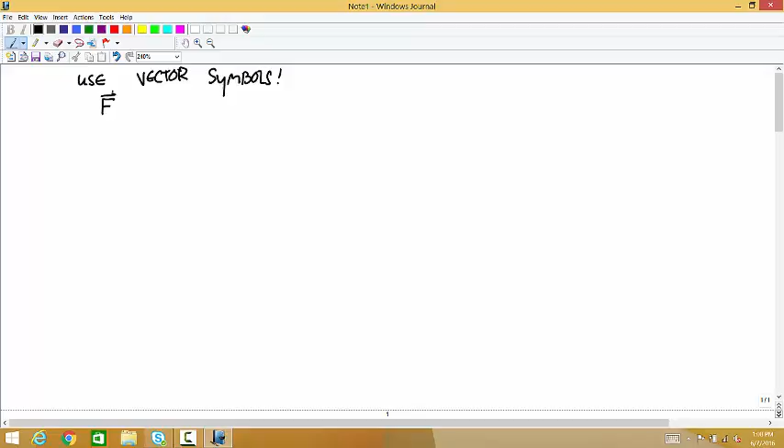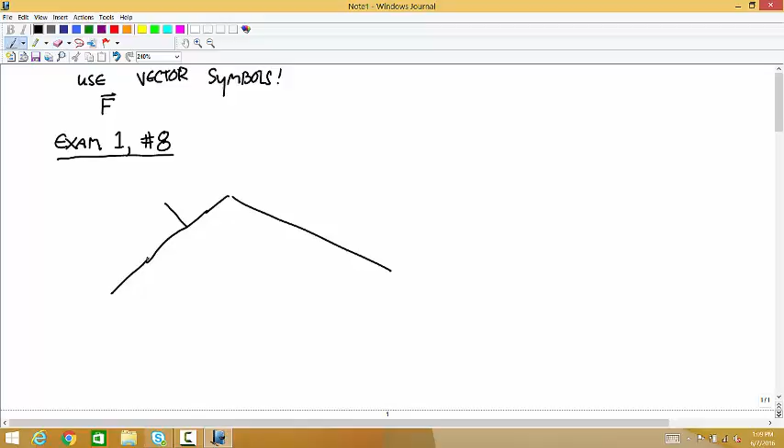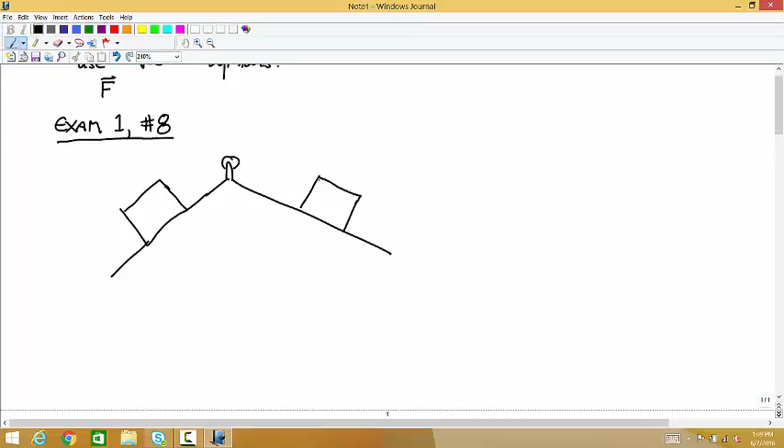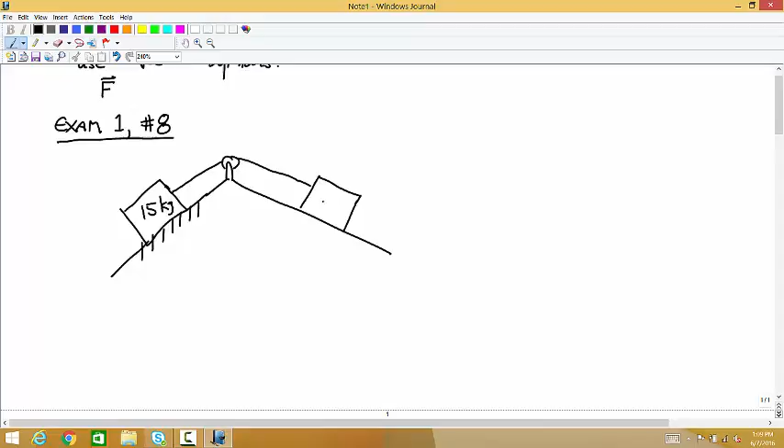So it looked like this: you had two boxes, each on a separate incline, connected to a cable that goes over a pulley. This one has a mass of 15 kilograms, this one has a mass of 10 kilograms. Then there's a downward force of 100 newtons here and a horizontal force of 50 newtons here.

And you had to draw the free body diagrams. So first for the 15 kilogram box: there was the weight, a force of 15G down, there was the 50 newton force this way, and there was the cable tension this way, which I'll call T.

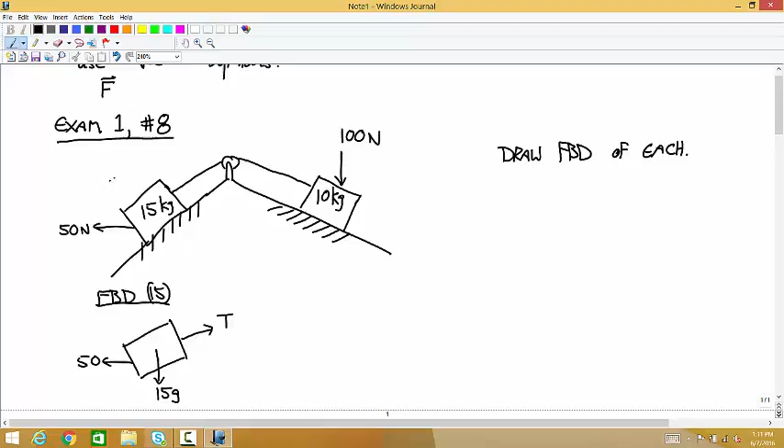And then it was a friction contact with the incline. Let's say we're using this coordinate system for both of them. The way you represent that is just as a full unknown force vector - I'll call that the force on the 15 by the ground, with a vector symbol since it's a vector variable.

And then for the 10 kilogram box, you have the weight, so that's 10 times G, then you have the downward force of 100 newtons acting there, you have the cable tension acting that way, and at the ground you have the force on the 10 by the ground. That's it. Any questions about that?

I have a question about the direction of the friction - is that always just going to be in the direction of the coordinate system? In this class, contact with friction is always just an unknown force vector. We're not breaking it up into a normal force and a friction force, we just draw it as an unknown force vector. So it doesn't matter - the direction of these axes depend on the coordinate axes, not the direction of the incline. Okay, gotcha, thank you.

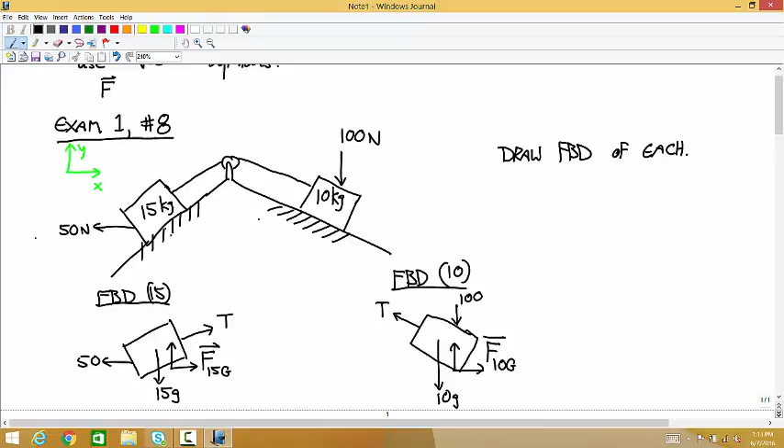Any other questions about this one? I had a question - if there is no friction on the 10 kilogram box, do I need to draw the reaction force for the 100 newton force? Yeah, if there was no friction, it would look like this.

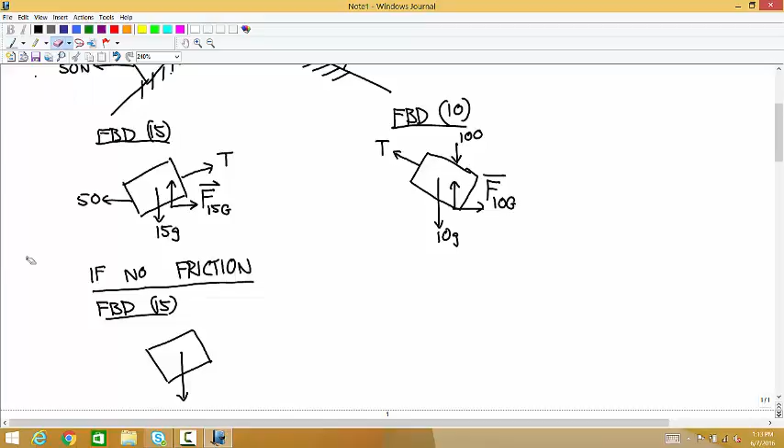You have the weight of 15G. You have the horizontal 50 Newton force. You have the cable tension. And then contact without friction is a force vector with a known direction, perpendicular to the surface of contact toward the chosen body. So it's the normal force.

What about the 10 kilogram? For the 10, you have the weight, the downward force of 100, the cable tension, and a normal force perpendicular to that surface. But normal force is only for the reaction force of the gravitational force, whereas you have the 100 external force pressing down. Do I need to draw the reaction force for just 100 Newton?

Nope. Because theoretically, if you press down stuff, this 100 Newton could be added up to the normal force. That's what I see, right? But say that this is in equilibrium, okay? If you calculate what this normal force has to be for this to be in equilibrium, with this at 100, you get one value. If you change this to 500, you get a different value for that reaction force. So that reaction force does depend on how big that force is pushing down. It does change, but you don't change the name.

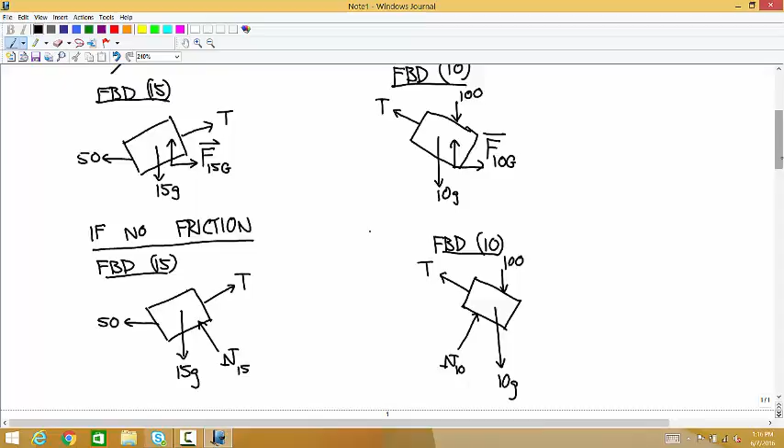Any other questions? Could you go over number 3? Okay, so number 3 says, what two unit vectors are perpendicular to the vector AB and the vector CD?

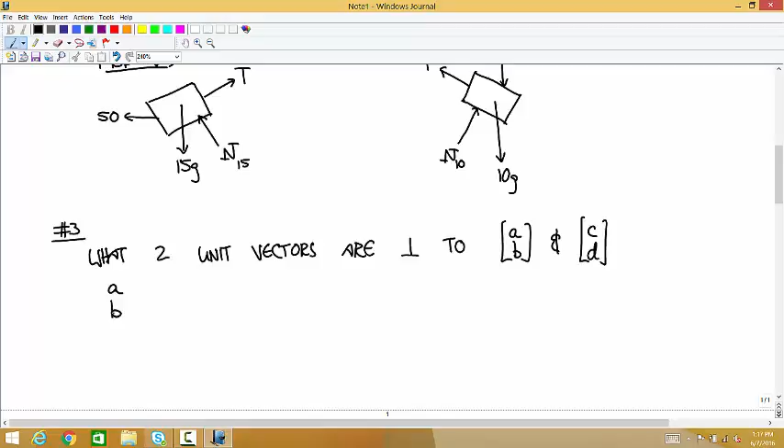The way we're going to do that is with the cross product. So we'll call it AB0 and cross it with CD0. And if you take that cross product, you get 0, 0, and then for the Z component, you get AD minus BC.

So in other words, a vector that's perpendicular to both of these is this. You could go through the whole process of calculating the unit vector based on these components, but what you can see is that this vector only has a non-zero component in the z direction. So you know that the unit vector in that direction is just going to be equal to either 0, 0, 1 or 0, 0, negative 1, because those are the two vectors with a length of 1 that are in the same direction as this, or that are in the same direction and the opposite of this. You could go through the process of doing this calculation and divide by the square root of the sum of the squares, and you'll get the same thing.

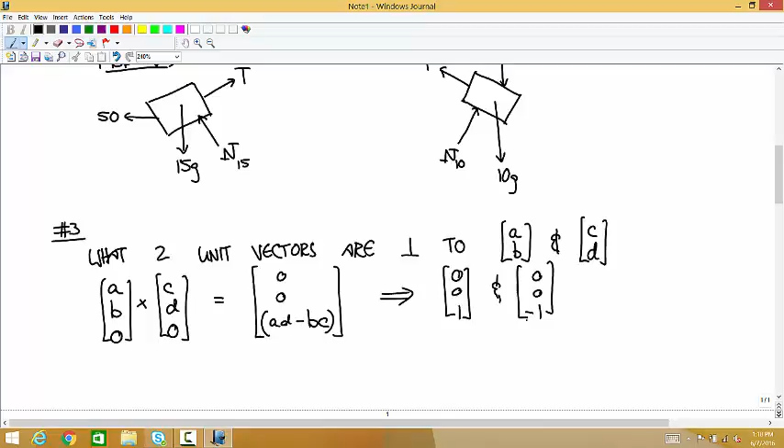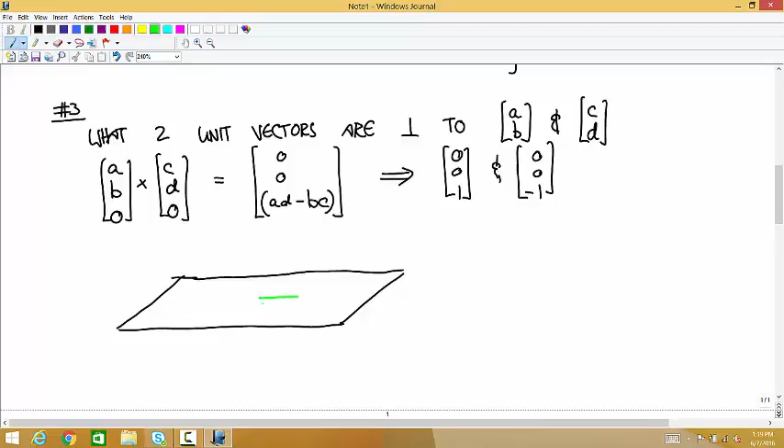Any questions about that one? Here's what's going on in this problem. So if this is the x-axis, there's the y-axis, okay? And we have two vectors that live in that plane, because they only have x and y components. So let's say one of these vectors is this, and one is this.

The two vectors that are perpendicular to these two red vectors are the two directions going out of that plane. So this and this. The unit vectors in those two directions are 0, 0, 1 going up and 0, 0, negative 1 going down.

I understand that, let me say more on this. So why do you choose 1 and negative 1 over anything else? Are those just going to be the standard of what you're going to do, instead of 0, 0, 2 and 0, 0, 3? Because I asked for unit vectors, and these are the two vectors in those directions that have a length of 1. Oh, I see, so that's okay.

So depending on what A, B, and C are, this could be 14, and so this perpendicular vector would be 0, 0, 14. But then when you went through the process of calculating a unit vector in that direction, you'd get 0, 0, 1. So I stopped at that one. Okay, yep.

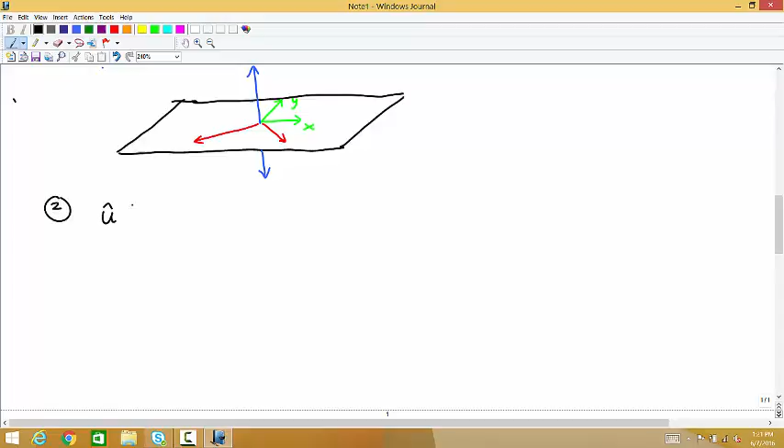So number 2, you calculate these 2 unit vectors. For A, you calculate u and negative u. And then to find 2 vectors in those directions with a magnitude of 50, you do 50u and negative 50u.

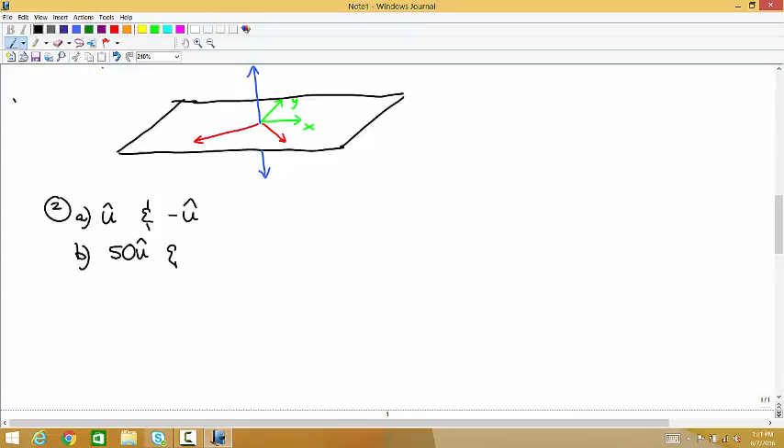And you can test that too. Like if you ever forget that, or you're not sure what to do, try dividing by 50, try multiplying by 50, and then use the formula to calculate the length of that vector, and you'll see that this one has a length of 50 and the other one has a length of 1/50th.

Any other questions? Could you briefly go through 6? I am going to end up doing all these, aren't I? Okay, so 6.

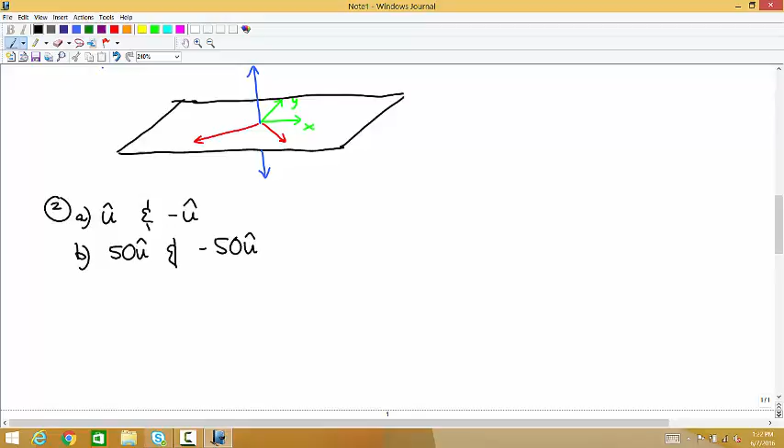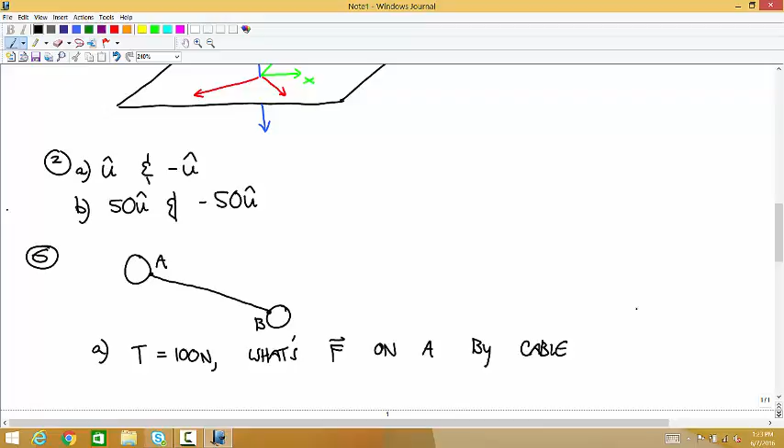The force vector, okay, so we have one thing there, one thing here. This is A, this is B. And it asks, what's the force vector applied to A by the cable? So the cable tension is equal to 100 newtons. What's the force vector on A by the cable? The cable always applies a force away from the chosen body, so we know that it's going to be in this direction.

Well, we know that magnitude is 100. So we're trying to figure out this vector. So the way to do that, the vector that's in the proper direction is going to be equal to the coordinates of B minus the coordinates of A. So that's 9.4, negative 3.42, minus the coordinates for A, which are negative 4.70, positive 1.71.

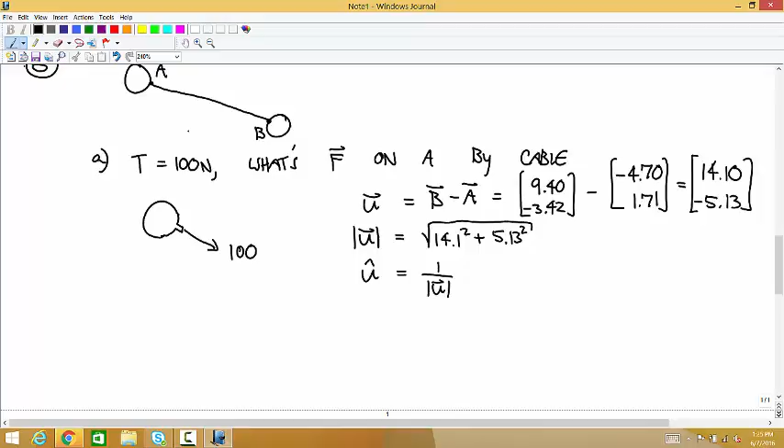And you get a value of 14.1, negative 5.13. Then the length of that vector, the magnitude, is the square root of 14.1 squared plus 5.13 squared. The unit vector in that direction is equal to 1 over the length times the vector. And then the force on A by the cable is just equal to 100 times that unit vector.

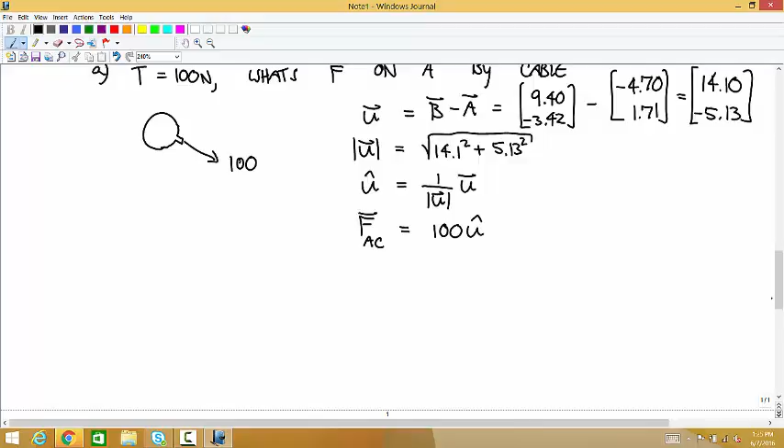Any other questions? Okay, so the next topic that we have to go through is how to deal with joints in 2 dimensions. And this is a really big topic in this class, a really important one. 2D joints.

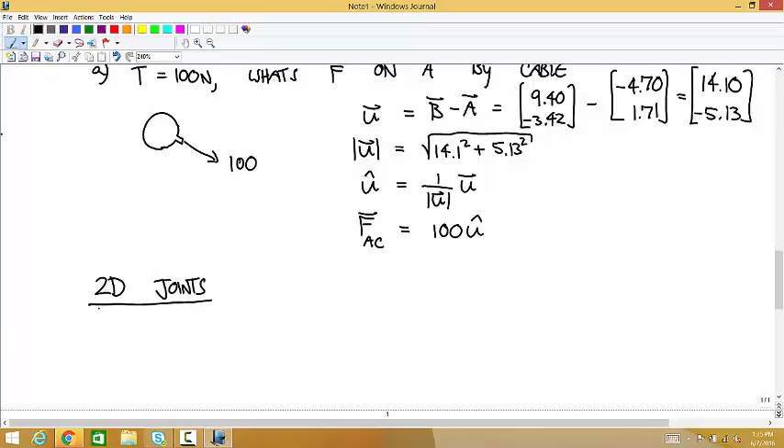A joint is a connection between bodies. Each joint applies a specific set of loads to the connected bodies.

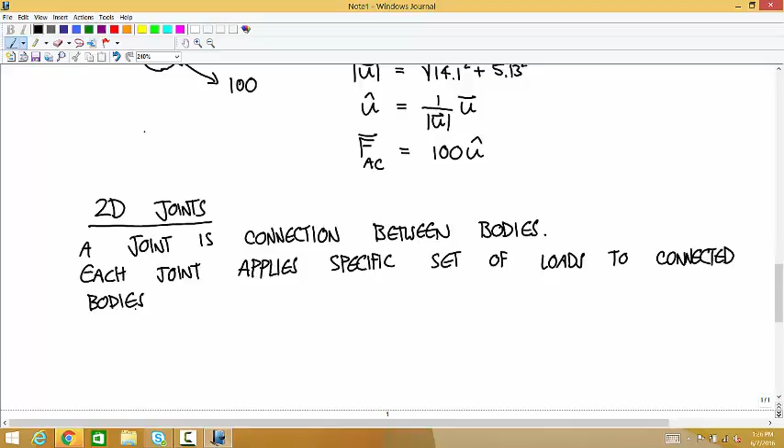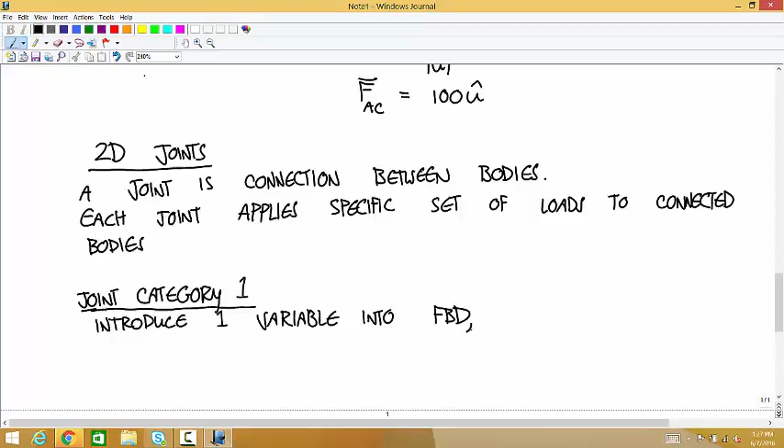And so I'm just going to go through all the joints that you're going to have to deal with in 2D, organized into how many variables they introduce into the problem, and what type of loads, how you have to treat these as loads. So category 1, joint category 1. So these are joints that introduce one variable into, let's say, the free body diagram of the body, and they apply a force vector to each body with a known direction.

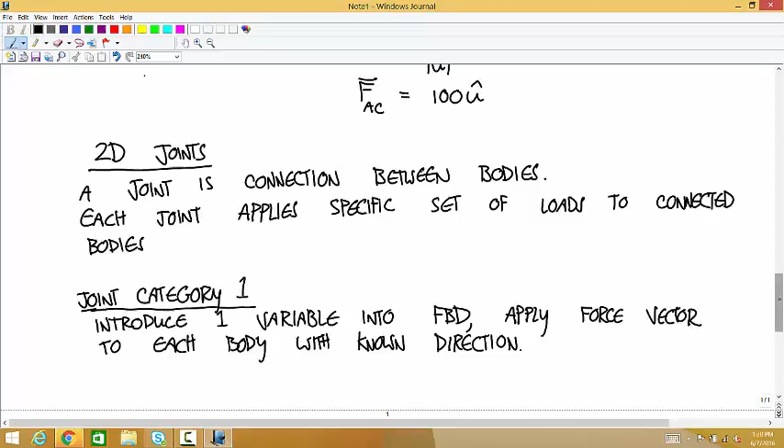So the first one, in this category, is contact without friction, and we've already talked about that one.

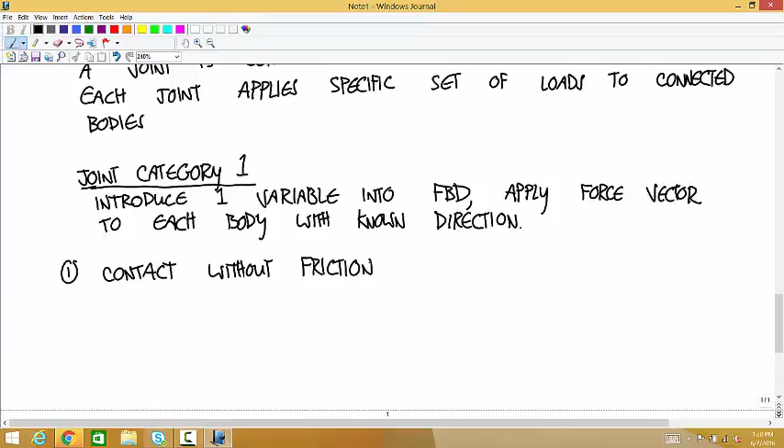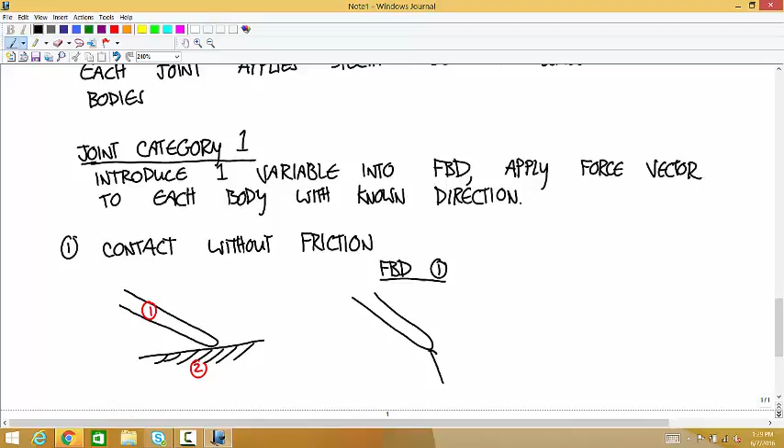So let's think of that as a ground and a body in contact with it, but there's no friction at that contact. I'll call this body 1 and this body 2. And I'm going to draw free body diagrams of both of these. So free body diagram of 1. I'm not going to worry about any of the other stuff that might be going on with this. I'm just going to draw the part of the free body diagram that deals with that frictionless contact. Body 1 has a force acting like this, I'll call it R, you can call it whatever. It's a force vector in a known direction, and that known direction is perpendicular to the surface of contact toward the chosen body.

And then the free body diagram of body 2, so that's the ground in this case. I'll separate out a chunk of the ground.

That joint, one way to think of it is this R is the force applied to body 1 by body 2. So over here you're going to have an equal and opposite force because of Newton's third law. The other way to think of it is this is a frictionless contact, so you have a force that's perpendicular to the surface of contact acting toward the chosen body. And in this case, the chosen body is the chunk of the ground. So that force vector is going to be that way with a value of R. Those have to be the same. Any questions about that one?

They're both, so both R's are perpendicular to the body. They're both perpendicular to this surface. Okay, gotcha.

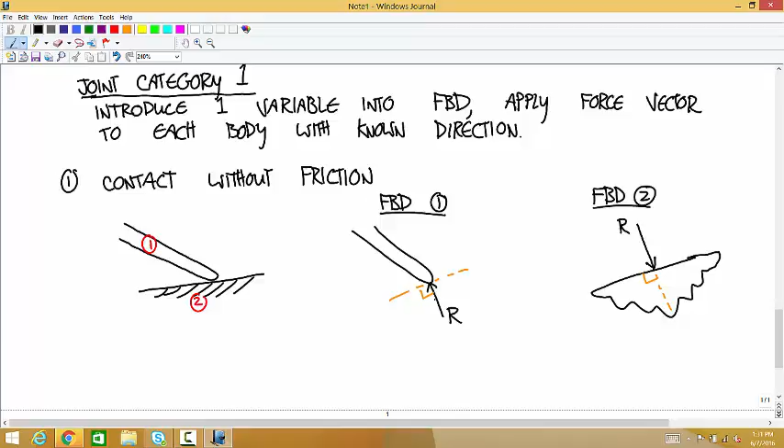Nope, because what that negative would be doing is changing the direction, and we're doing that with the arrow. So you could keep the arrow the same and make it a negative R, but that's not how we're doing it. But what you can't do, so you could change the R to a negative R, or you could change the arrow, but if you do both, you get a double negative thing, and it's actually wrong then. So don't think of that as like the deluxe model of Newton's third law, you know what I mean?

So one thing to notice about this is for this kind of joint, R can only be positive because you can't ever have, if it's a frictionless contact, you can't ever have the ground pulling down on member 1. Okay, so R must be positive. If you ever do a calculation and you calculate an R that's negative, something went wrong in your calculation or something in the problem design, the structure that you're designing isn't going to work the way you mean it to.

To what extent can we use statics to solve real-life problems, like when you're designing something? I know that for sure that you're supposed to use finite elements if you want to be precise about the reasons.

Yeah, well, statics, I mean, you can, everything that we're talking about in statics, you can use all the time. We're not going to make, so you're talking about in D form, if you're trying to do realistic stress and strain calculations, in many cases you have to use a numerical approach because we had so many simplifying assumptions that we used. They're not going to work for this kind of body or this shape or this kind of material, remember all that stuff? There's nothing like that in statics. So everything we're talking about works perfectly.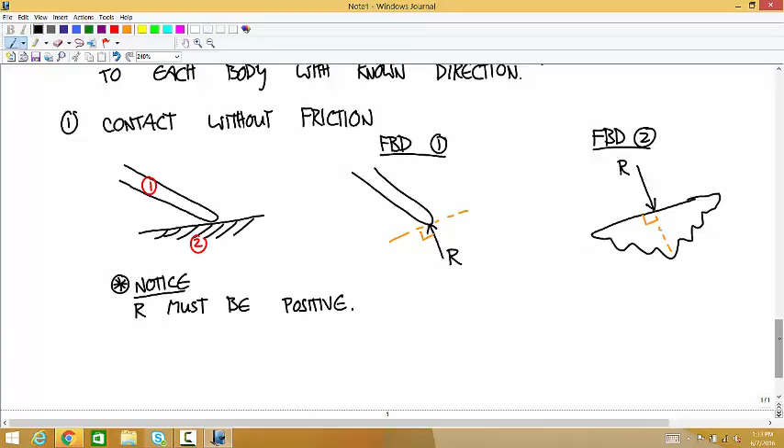So can you consider statics as more like a way to calculate the distribution of the load, per se? Well, the topics that we're doing right now are just for calculating the external loads on objects. And then remember, in D form, you use those external loads to calculate the stresses. So you could think of this as like the first step in getting to the stuff that you get to in D form.

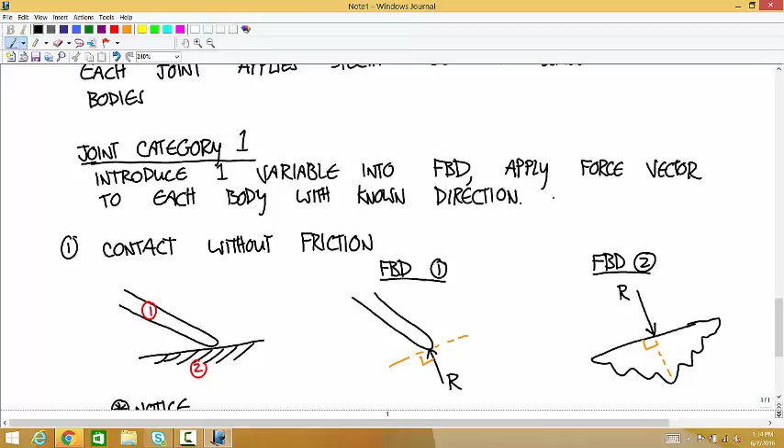Okay, so we're in this first category, all joints that introduce one variable into the free body diagram. And here you see how that variable occurs. In these two free body diagrams, the variable is R. And it does it by applying a force vector in a known direction. So here's the second type of joint in that category, a roller.

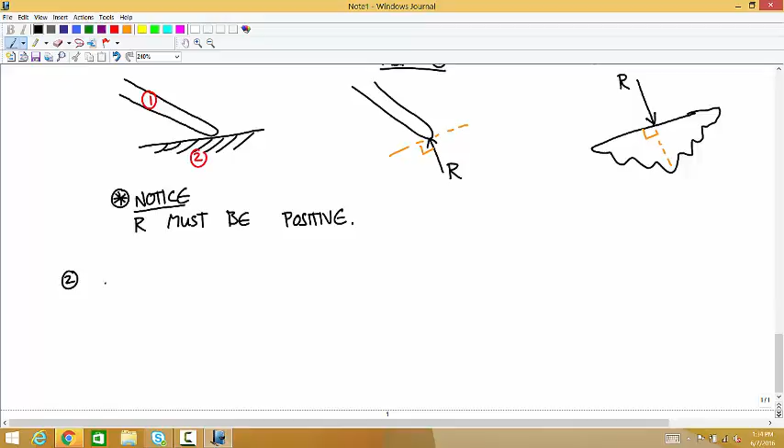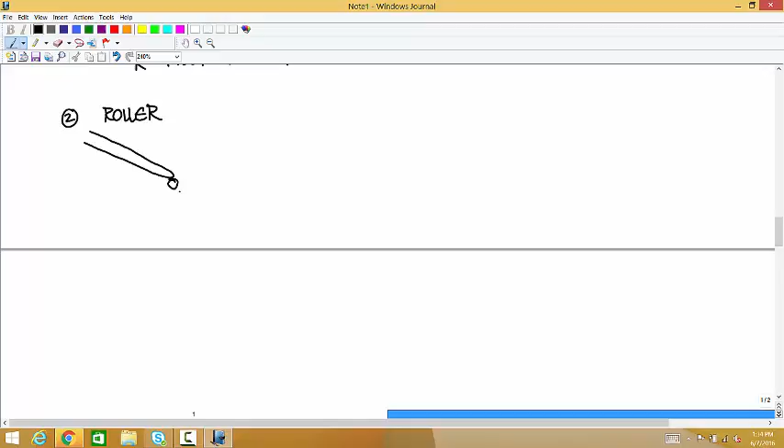And you see these in problems a couple different ways. Sometimes you see it just as like a little wheel or something between two bodies. Sometimes you see it as one of the bodies wearing sort of like a roller skate. That's my favorite kind, because roller skating's so fun.

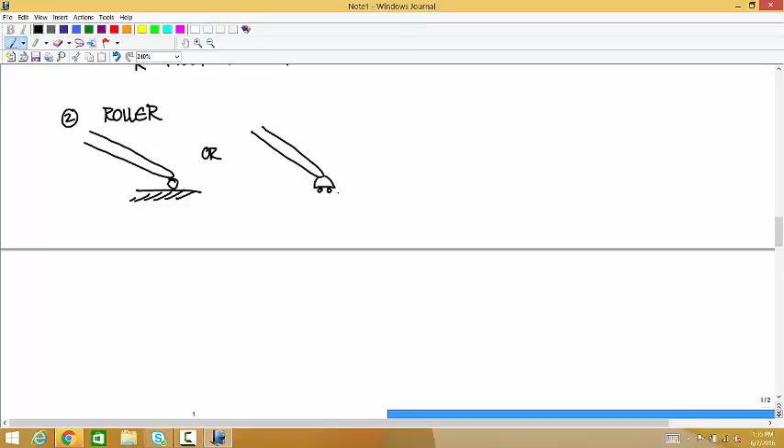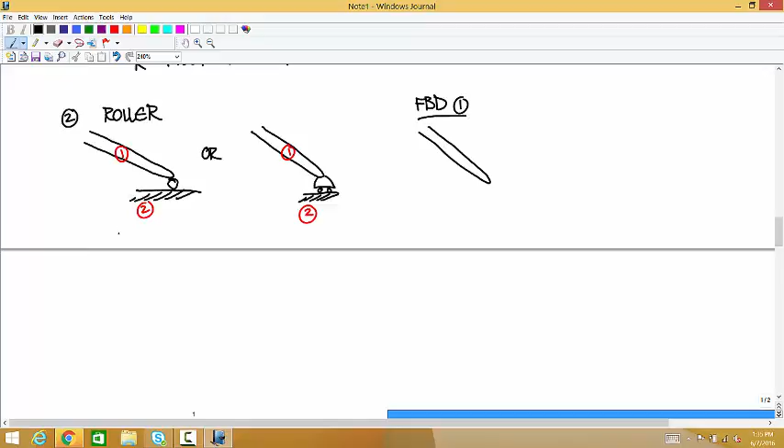Okay, but those mean the same thing mathematically. So the free body diagrams, if we call this body 1 and this body 2, or this body 1 and this body 2, the free body diagram of body 1, again, you can think of it as basically exactly the same as contact without friction. You just have a force that's perpendicular to the surface of contact, and the force is going toward the chosen body. So that and a single scalar variable R.

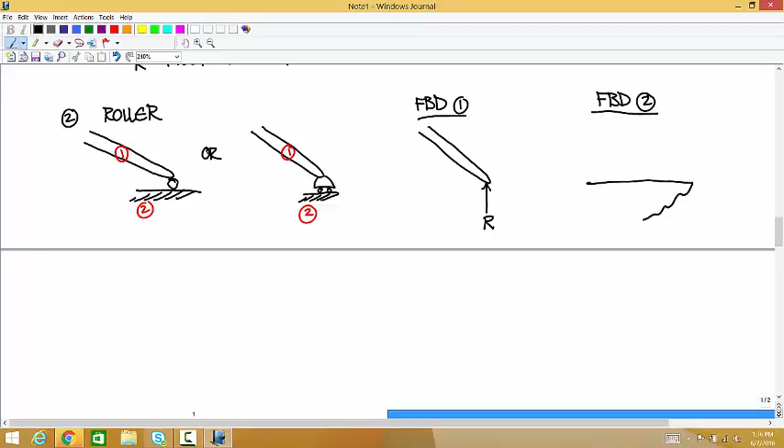And if you isolate the other body, so isolate a chunk of the ground, you have an equal and opposite force like this. And again, notice that that roller can't pull the objects together. It can only push them apart. So, again, R must be positive.

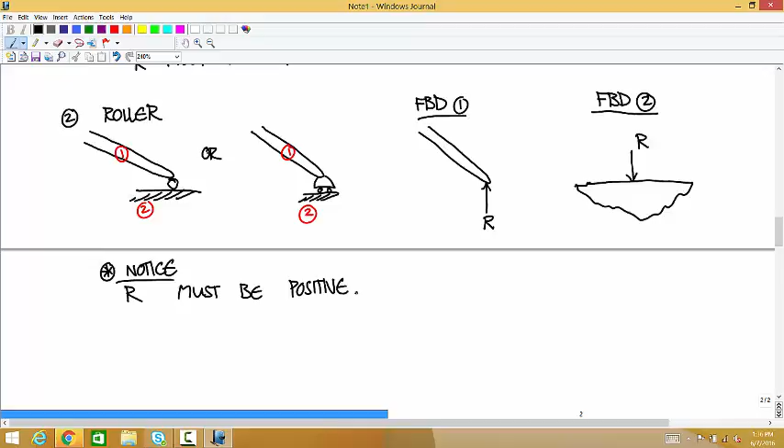And then the last one in this category is a pin in slot joint.

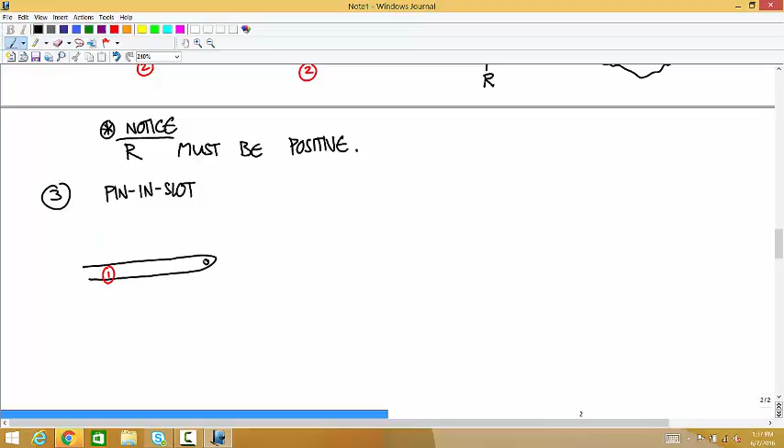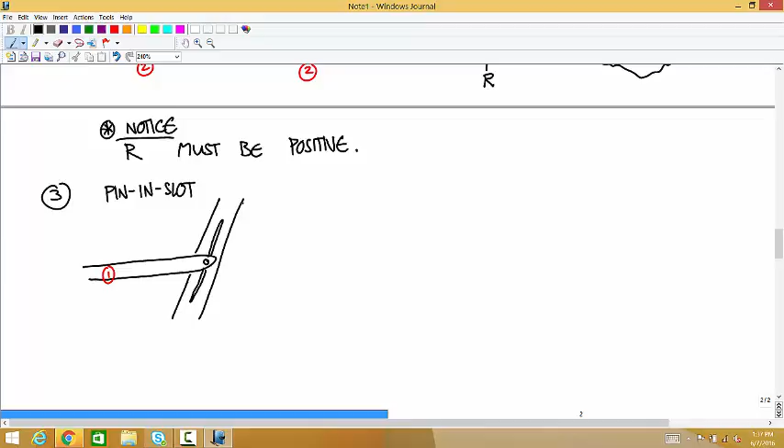So let's call this member 1, and there's a pin connecting member 1 to a slot in member 2, so that pin can slide along this slot. And this is member 2. So this produces a force vector perpendicular to the slot.

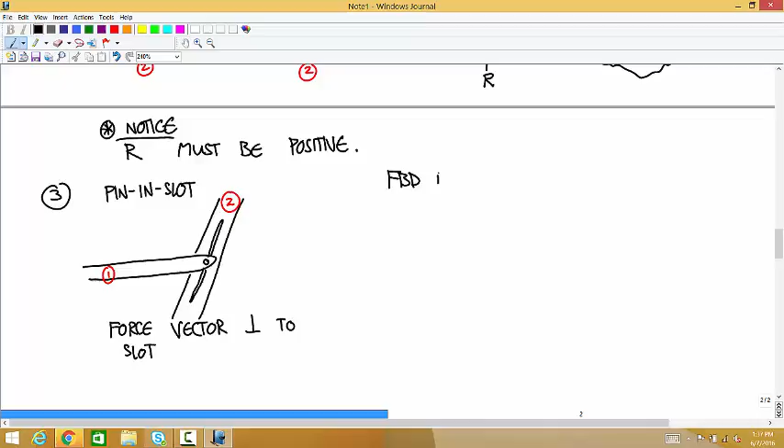So free body diagram of member 1 is like that. And a free body diagram of member 2 is like that.

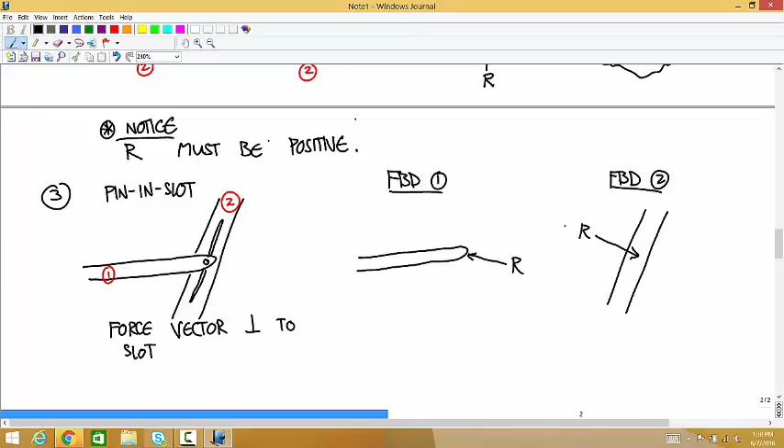So again, this is going to be the case in all of these. These forces are equal and opposite because of Newton's third law. And notice this one's different than the other two. This slot can push member 1 towards the left, or it can push it towards the right. So the variable R can be positive or negative in this case. It could only be positive in the other two cases.

Any questions about any of those yet? In the free body diagram, you could. Yeah, either way is fine.

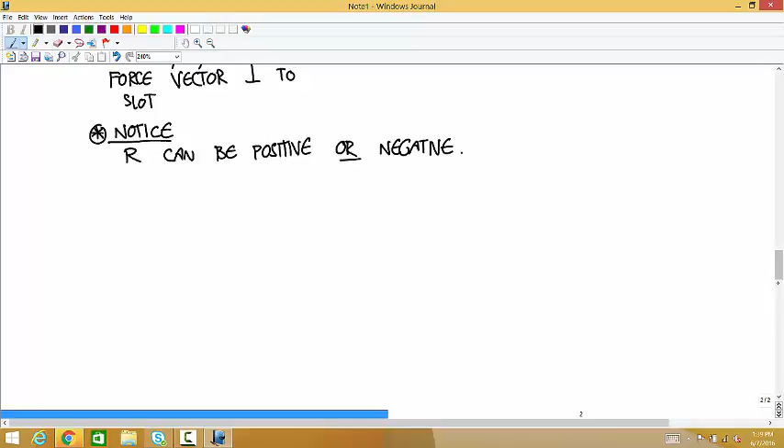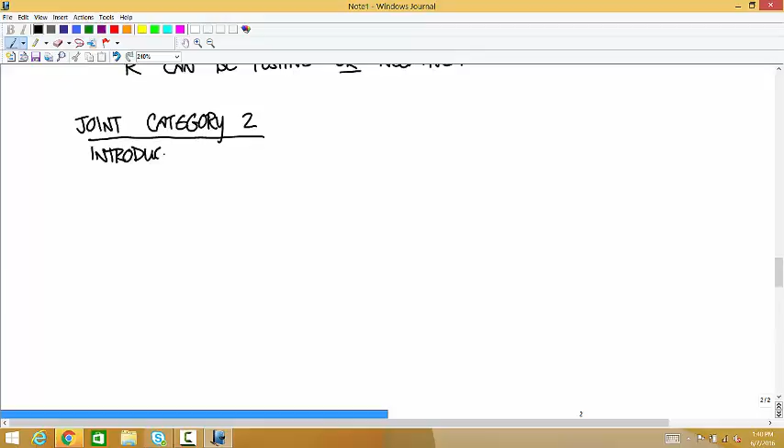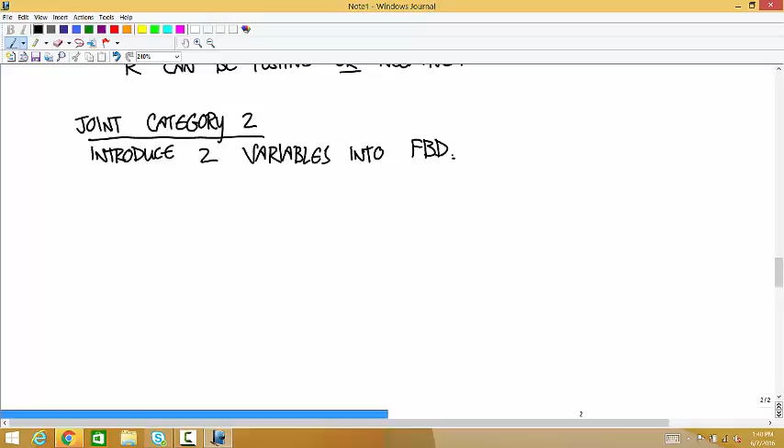Okay, so now category 2. Joint category 2. So the joints in this category introduce two variables into the free body diagram, and they apply a fully unknown force vector to each body.

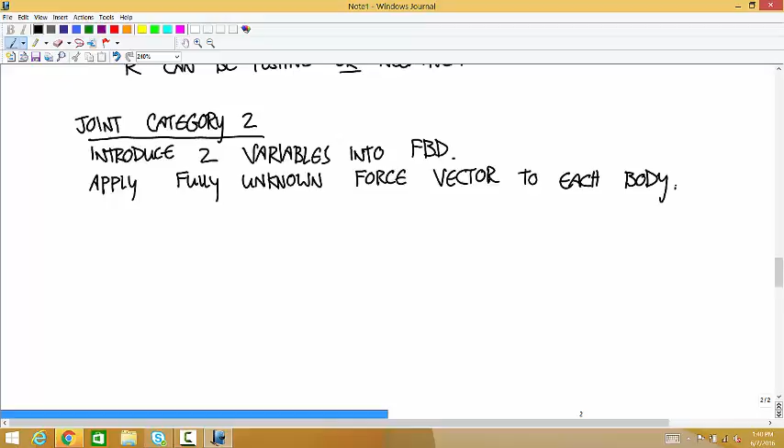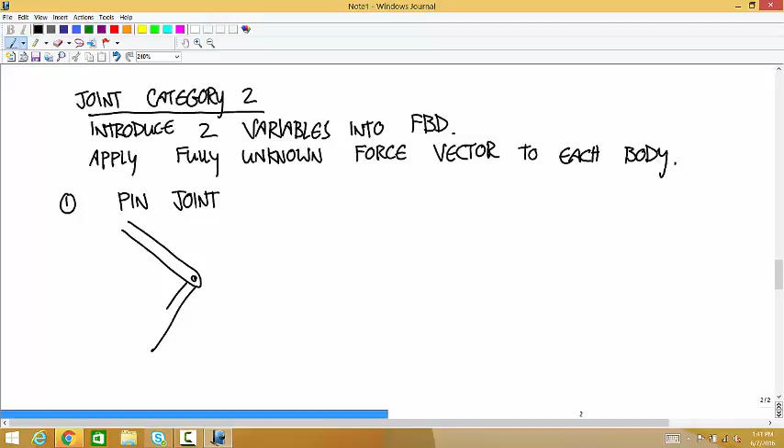Okay, so joint number 1 in this category is a pin joint, and it looks something like this. You can think of that as like a hinge. If this is member 1 and this is member 2, then a free body diagram for member 1 looks like this, the force on 1 by 2. And the free body diagram for member 2 has a fully unknown force vector that's equal to the force on 2 by 1, and that's the same thing as negative F12 by Newton's third law.

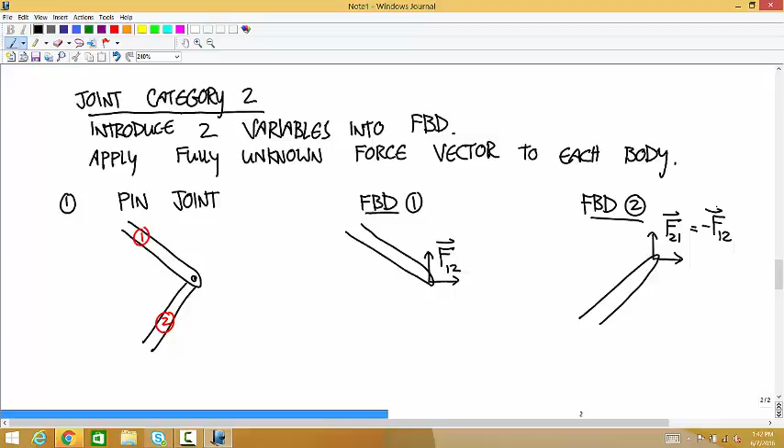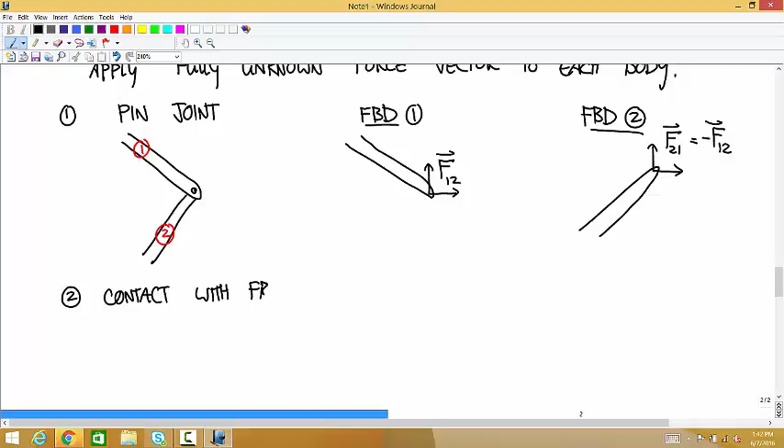And the second one in this category is contact with friction. We've already talked about this one. This looks something like this. It really looks the same as contact without friction, except something in the text will just tell you that there's friction at that contact.

So here's member 1, here's member 2. A free body diagram of member 1 looks like this, the force on 1 by 2. And a free body diagram of member 2, isolate a little chunk of the ground, looks like force vector F on 2 by 1, and that's equal to negative F12.

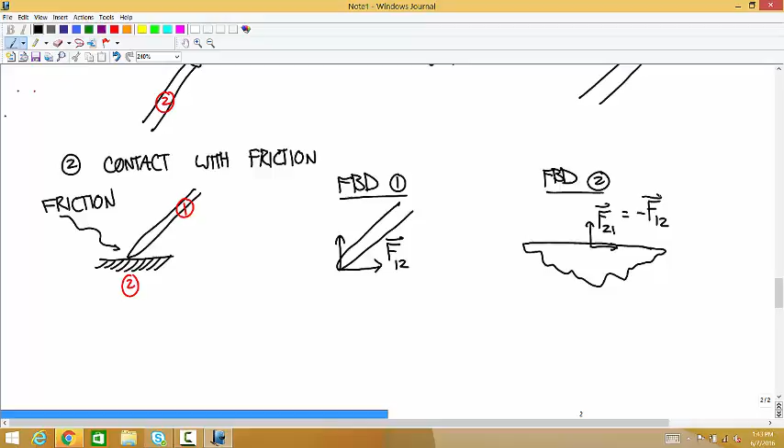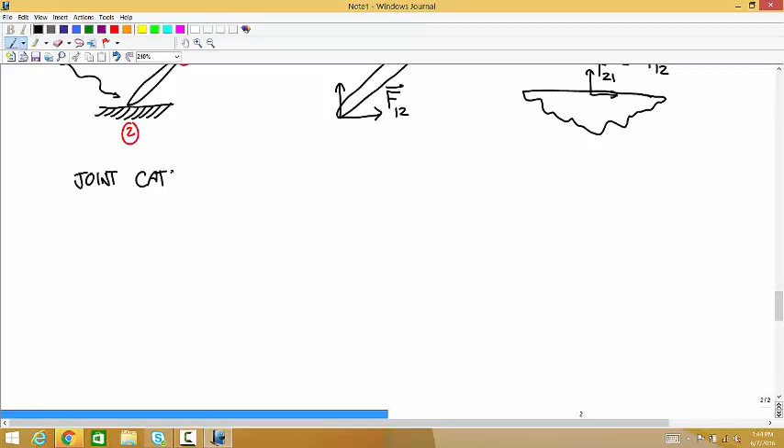And then the last category only has one type of joint in it. So joint category 3. How many variables is this one going to introduce? The last one introduced 2, so this is going to introduce 3.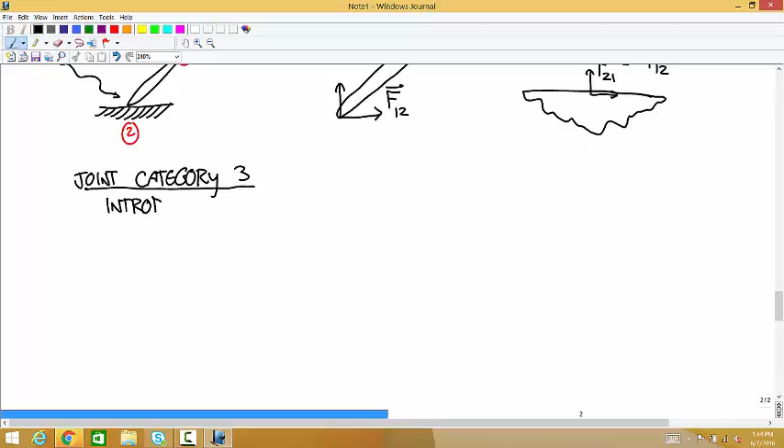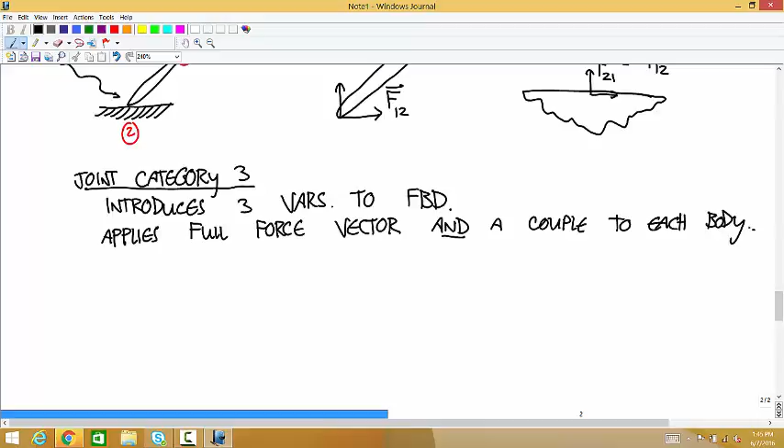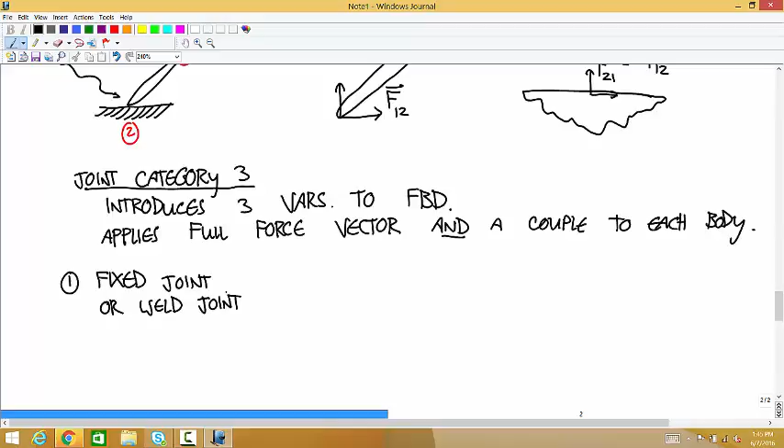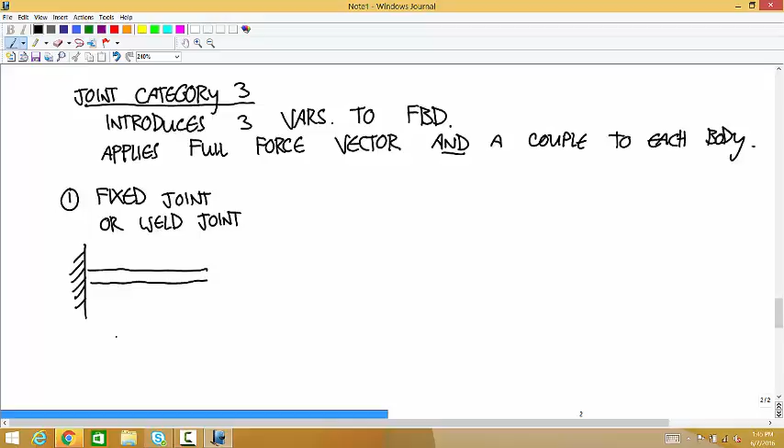And this applies a full force vector and a couple to each body. There's only one of these. It's called a fixed joint or a weld joint. It looks like, sometimes you see it like this, sometimes you see it drawn like there's a little notch in one of the members like this. But they mean the same thing. That's a connection that just doesn't allow any motion between these two bodies.

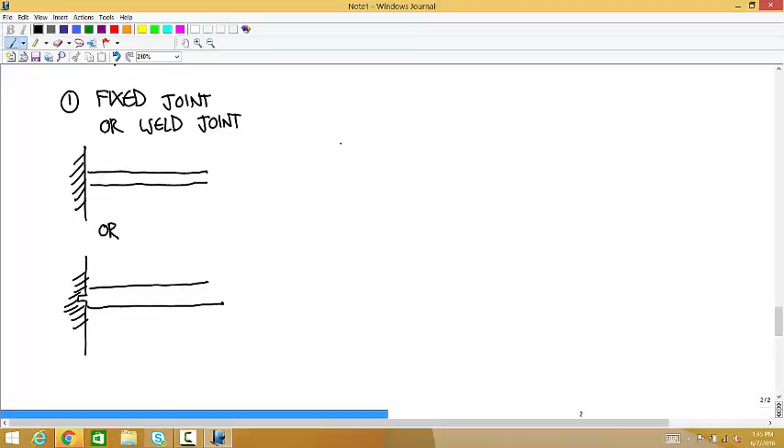I'll call this member 1 and this member 2. So a free body diagram of member 1 looks like this. You have a full force vector, I'll call that the force on 1 by 2. And then you have a couple, which I'll represent as a pure moment. And for couples, we can use that subscript notation because couples are made up of force vectors. So as long as you always use the sign convention where a positive value of your couple is a counterclockwise rotation, you can call this the couple on 1 by 2.

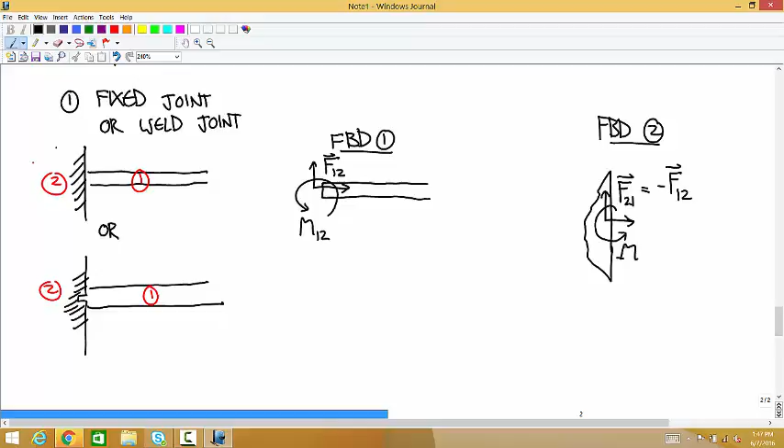Free body diagram of member 2, take a chunk of the wall. That's equal to the force on 2 by 1, which is equal to the negative force on 1 by 2. And also a couple M on 2 by 1, which is equal to negative M12.

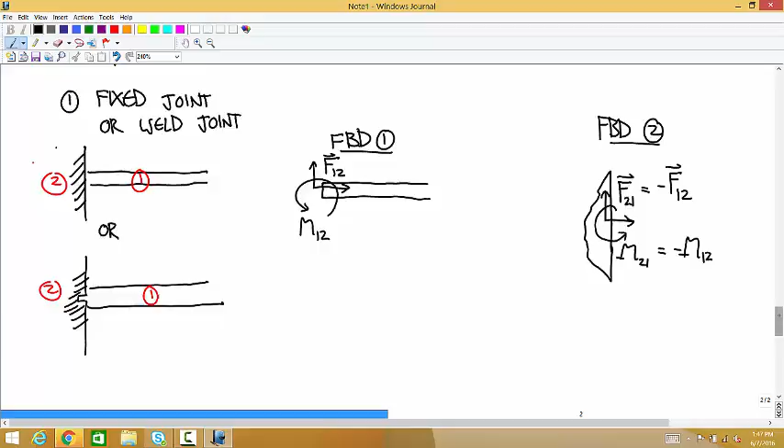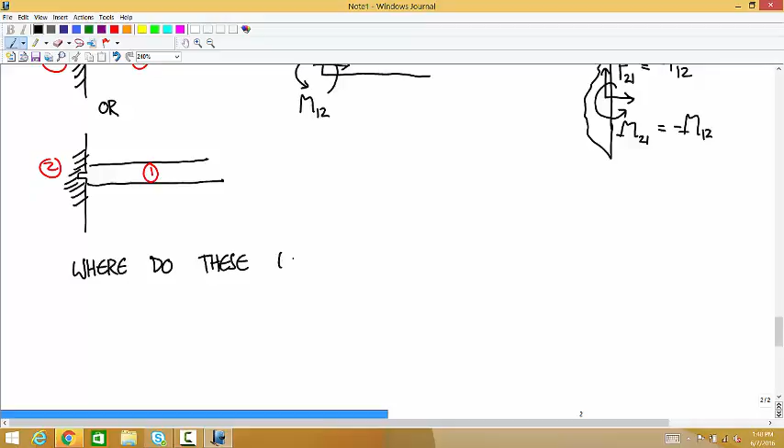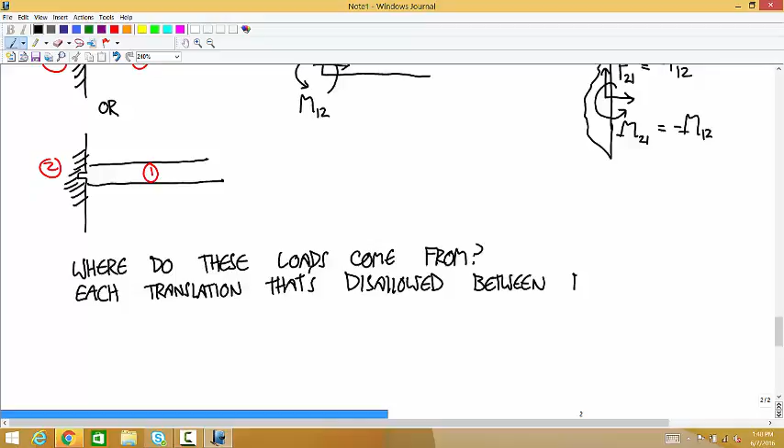Okay, so this is a lot of stuff to remember if you choose to do it that way, and you can, you can always just Google stuff. But I think a more effective way to think about these joints is to understand how those loads are developed. So where do these loads come from? And especially in 3 dimensions, I think this becomes even more important. Each translation that's disallowed between bodies is caused by a force component in that direction.

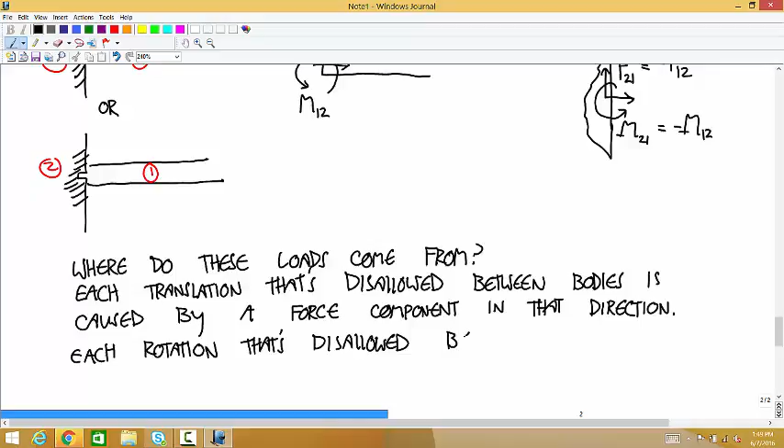Each rotation that's disallowed between bodies is caused by a couple between bodies.

Let's go back through some of these joints and try to make sense out of where those loads come from.

On the couple, I can use vector notation for M. Since this is a 2-dimensional problem, the moment itself is a vector, but the axis can only be in the z direction. Since this is a 2D problem, rotations can only happen about a z axis, so in 2D there's not really any point in treating it as a vector.

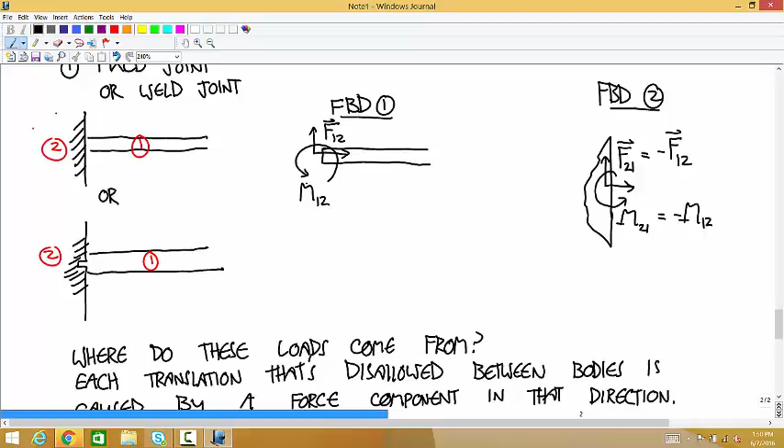In 3D, we are going to have to treat them as vectors, and the way you represent components of couple vectors is with this double arrow notation. So this is how you would represent a couple vector, and then you would write M vector. But in 2D, we're just talking about a single component, a z component.

So what is translation? Linear motion? Yes, that's right.

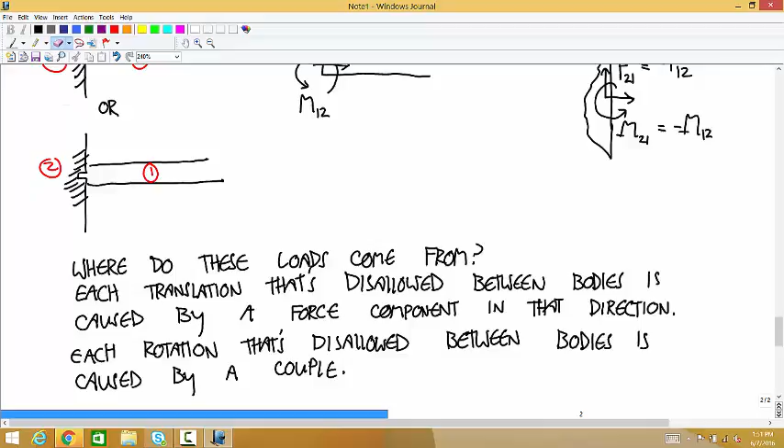Let's go back through these and think about this. Let's just do one from each category. So first, in that category where it introduces a single variable and the joint applies a force in a known direction...

Let's think about what motion is disallowed at the point of contact. Picture member 2 being fixed and think about the motions allowed by member 1. Can member 1 rotate, first of all? If this is the only thing restricting it, yes, member 1 can rotate, so we know there's no couple between them. There'd only be a couple if its rotation was fixed.

Can it translate perpendicular to the surface? No, and that's where we get this force vector. Can it translate parallel to the surface? Yes, and that's why we don't have any other force component besides that perpendicular one. Any questions about that?

Now let's go to a pin joint. Imagine member 2 is fixed to the ground, I just think it's easier to imagine what's going on if you do that. So this stays exactly fixed, it doesn't translate or rotate at all.

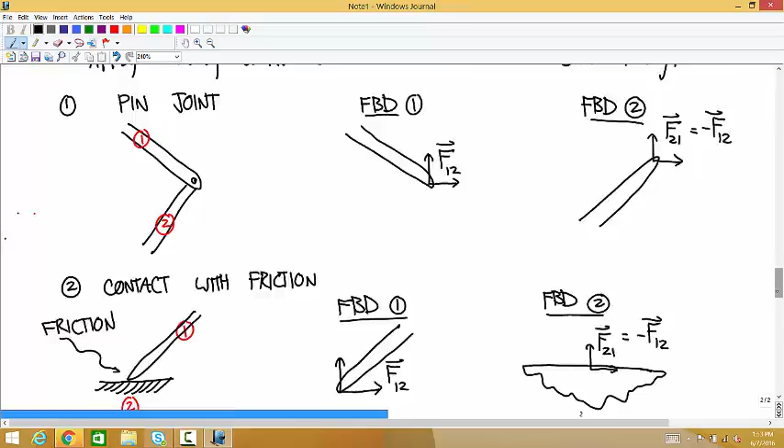And then go to the last category, the fixed joint. So imagine this part's fixed, imagine these welded together. Can this rotate? No, so there has to be a couple.

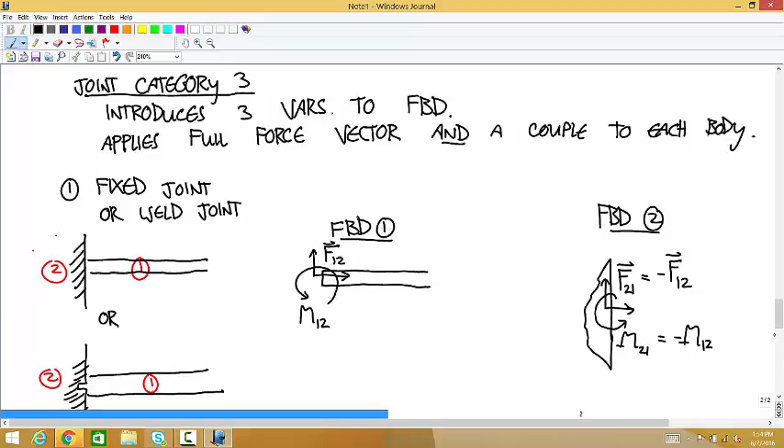Can it translate in the x direction? No, so there has to be an x component of the force. Can it translate in the y direction? No, so you have a full force vector and a couple. So that's where those loads come from.

So the only way that we can think of the pin joint is as a socket? Is that the case? Because if you think about a pin between 2 plates, then that can't rotate on one axis, right? It can't rotate from A to B.

Well, you're right, you're talking about off-axis rotations. Right now we're only thinking about stuff in 2D. Pretty soon we're going to think about it in 3D, and then that's exactly right. A pin joint like this doesn't allow them, if you try to push one into the page and pull one out of the page, it does resist that kind of rotation between the bodies. So this pin joint actually would apply couples, they're just not in 2 dimensions, or we're not thinking about that in a 2-dimensional problem. But yeah, you're right.

Okay, any other questions?